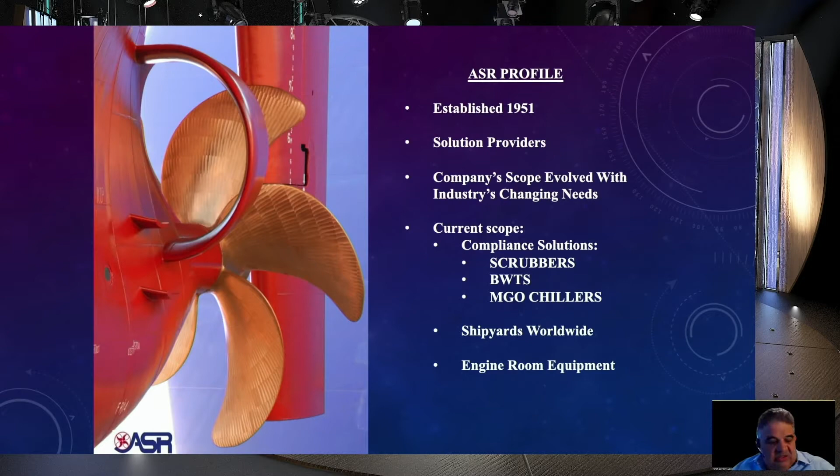Just a little bit of background on our company. We're established in 1951, a solution provider. We have evolved over the years based on the requirements of our customers and the market. Today, we're in the scrubber business, the ballast water treatment business, the MGO chiller business. We represent an international portfolio of shipyards, as well as an engine room equipment support business. Next slide, please.

Shipping, to borrow a phrase from one of my favorite movies, The Godfather, this is the business we've chosen. I'm sure many of you have been at cocktail parties where people say, oh, you're in shipping, what do you mean, like UPS? No, not like UPS, not like FedEx. This is a great business, an important business. We move 90% of everything, as the book says. The question these days is, can we do this work without harming the planet? And what regulations are there, and how do we comply with those regulations and do this important work that we do? Next slide, please.

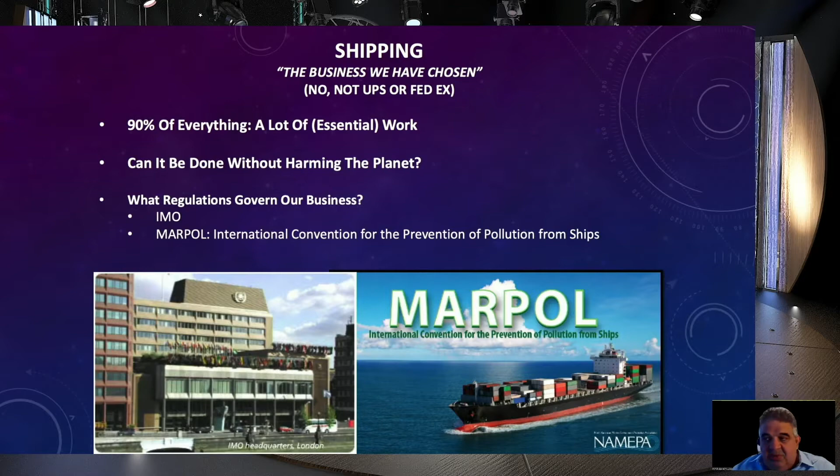Of course, we have the regulations of the IMO, and they are enforced, as everybody knows. We have the governing bodies that take from the IMO regulations and apply them to flag state. At the end of the day, your flag state says these are the regulations. If you don't comply, bottom line, we'll take your citizenship away, we'll take your flag away, you won't be able to trade. The enforcement part of it is at port state, which basically says, are you complying? If you're not complying, you can't leave our port, you can't trade. Here in the United States we have the U.S. Coast Guard, we have the Justice Department, which are not kidding in terms of enforcing these rules. If you don't comply, you can get not only your ship, but your company and even individuals in trouble, especially and recently with the Justice Department. Next slide, Joe, please.

So what are the regulations? I know I'm preaching to the choir here. MARPOL Regulation Annex 1, Annex 2, Annex 3. Next slide, please - I don't want to take too much time because we're going to cover this. Annex 4 for sewage, Annex 5 for garbage, Annex 6 for air pollution, all valiant efforts and all challenges, as this topic says. There are challenges and there are solutions. Next slide, please. So it's a lot, right?

Ballast water, invasive species - it's a serious business. It's not a joke, it's not a tree-hugging fantasy. It's an important business. If you look at these slides, the cartoon on the left, but on the right you see what one group of organisms did to a cooling system. This is important business, and it's something that's important and needs to be complied with.

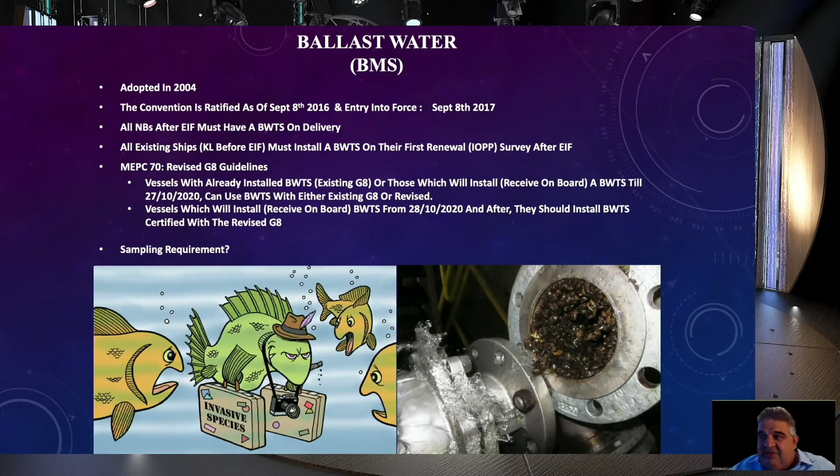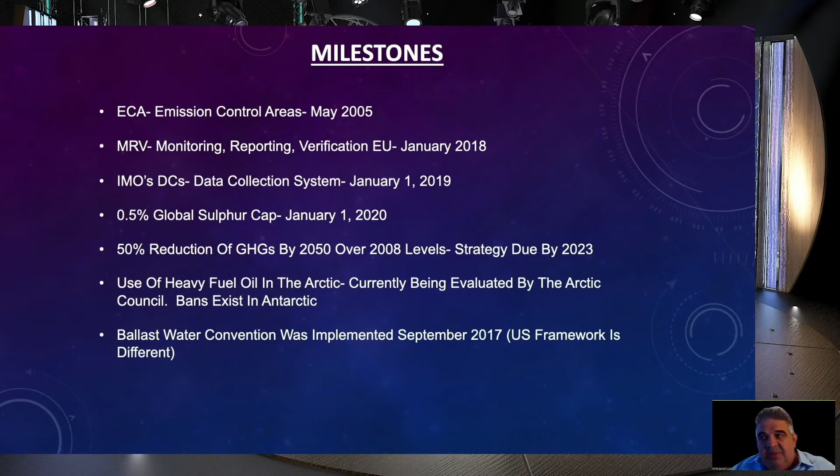Next slide, please. So what do we do? Well, let's first talk about the milestones. Of course we have the ECA regulation, MRV, the sulfur cap, the future planning for greenhouse gases and so forth, the Arctic preparation, prevention of further damage to the Arctic and the Antarctic, and the Ballast Water Convention, which is already in place, and measures have been taken in order to adhere and comply. So it's a lot. Next slide, please.

It can be daunting. So what do we do as an industry? What do we do as a populace? One, trust science. Two, listen to the experts. Full disclaimer, those two are not political statements these days. It just makes sense, right?

So today's expert speakers are going to show and discuss. I just tried to refresh on what the challenges are, but for the solutions, we have experts here who are going to show the science and the technology that is available to comply and meet these important regulations.

We have Dr. Effie Tsolaki from ERMA First, who's going to talk about ballast water compliance. We have Val Cannon from TMS Ocean Guardian, who's going to talk about the Ocean Guardian system, which helps navigate and organize and understand all these regulations based on where you are. Fantastic system. We have Nick Confuorto, also a friend, who's going to talk about Annex 6. Mr. Kyriazis from P-Ship Systems. And finally, Giles Candy from Scienco Fast, who's also going to talk about Ballast Water Technology. With that, I thank you, and I turn it over to the experts.

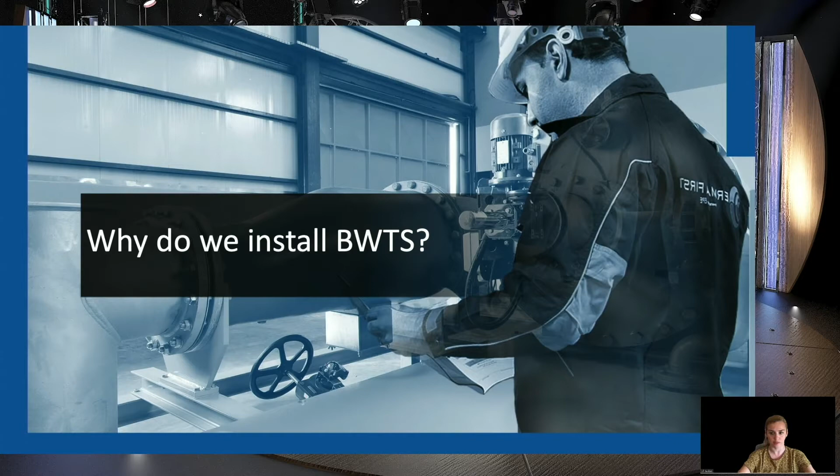So why do we install a ballast water treatment system? There are many reasons why a ballast water treatment system is necessary aboard a vessel. First of all, it is for environmental protection. Invasive aquatic species present a major threat to the marine ecosystem, and shipping has been identified as a major pathway for introducing species to new environments. So it is the obligation of the vessel to follow the rules.

The Ballast Water Management Convention came into force in September 2017, and this is the entry into force date. Since then, until 2024, all vessels of 400 gross tonnage and above should manage their ballast water and sediment to the D2 performance standard.

Other reasons, as Peter mentioned, are the ability of vessels to have the ticket to trade. After the entry into force of the convention, every vessel subject to it needs to have an International Ballast Water Management Certificate, which includes ballast water management via a ballast water treatment system. If such is not in place, then the vessel will not be able to trade.

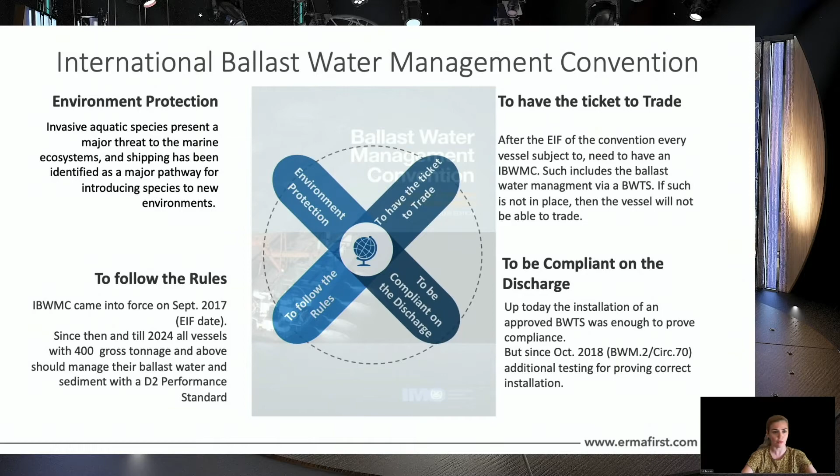The last reason is to be compliant on the discharge. Up to now, installation of an approved ballast water treatment system was enough to prove compliance. But since October 2018, additional testing for proving correct installation was introduced by the IMO with circular BWM.2 Circular 70. Next, please.

Let's continue with the ways to comply with the regulations. First of all, owners should select an efficient ballast water treatment system, not just a type-approved one. The administrations have already conducted several compliance tests on vessels, calling for reports. This is part of the IMO's experience building phase. As of today, almost 60% of those reports are failing on organisms more than 50 micron testing.

This is a problem, and what we need to do is understand the reason behind it—why we have these failures of more than 50 microns. The following failing reasons were identified.

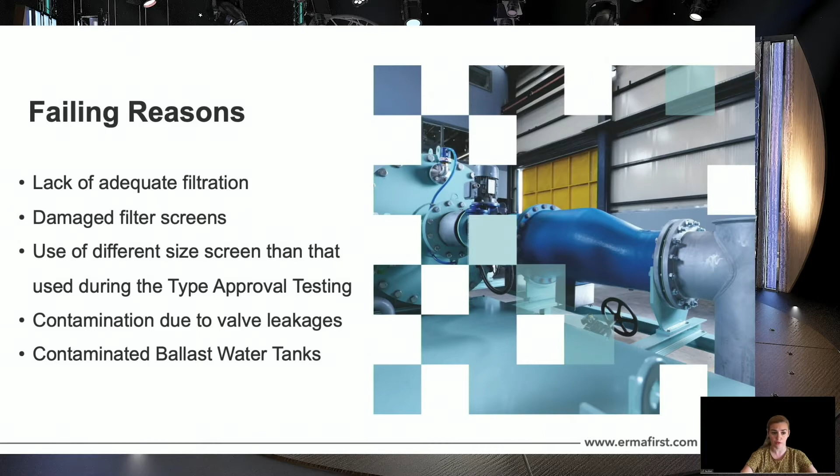We can have a lack of adequate filtration, damaged filter screens, the use of a different size screen than the one used during type approval testing, or contamination due to valve leakages or contamination of the ballast water tanks.

The second way to comply with the convention is proper use of the ballast water treatment system when it is installed. There are many cases where ship owners are not operating the system—they leave it idle. The system should be operable on every operation.

In order to use the ballast water treatment system, ship owners have to select a vendor that should provide full support to the operator and the crew. They must ensure critical spares are stored and available on board, and have a complete list of contingency measures in the ballast water management plan to avoid delays.

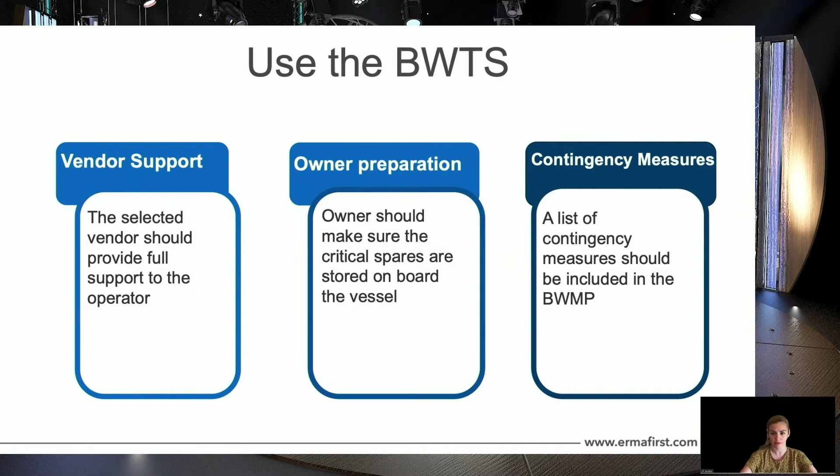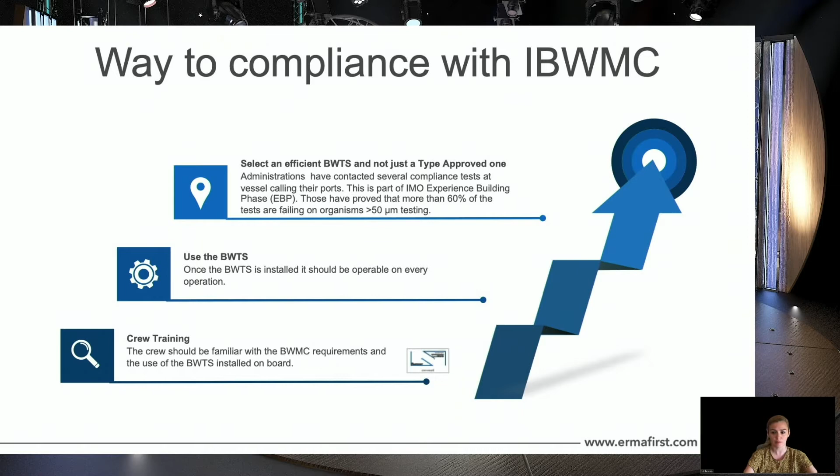Last, crew training is a very important aspect. The crew should be familiar with the convention requirements and the use of the ballast water treatment system installed on board.

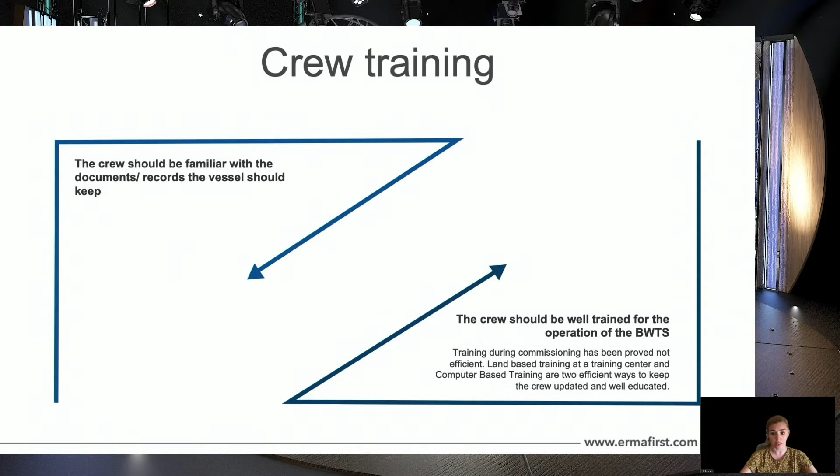The crew should be familiar with the documentation and records vessels must keep and report to every port and flag, and should be well trained on operating the ballast water treatment system. It was identified that training during commissioning has not been efficient. Land-based training at a training center and computer-based training are two efficient ways to keep the crew updated and well educated.

As we move forward in this technical workshop, the following section explains the way towards testing. We can start with what is the legislation trend that is around.

First, we have Circular 70, introduced back in 2018 by the IMO, which is the guidance for commissioning testing.

From summer 2019 onward, several countries have shared circulars or notice guidances for commissioning testing: Singapore, Panama, Australia, Cyprus, Greece, Bahamas, Croatia, and from classification societies, DNV GL.

The European Union has also announced the adoption of compliance testing and commissioning for all members from October 2021.

For the US flag, this is a different perspective entirely - protocols and sampling are different. We have two different bodies regulating this: the EPA VGP and what is mandated in the CFR rules.

Finally, in February 2020 during PPR 7, there was a draft amendment to Circular 70 sent for adoption to MEPC 75. This session was supposed to take place in spring 2020, but due to COVID-19 it was postponed to November 2020.

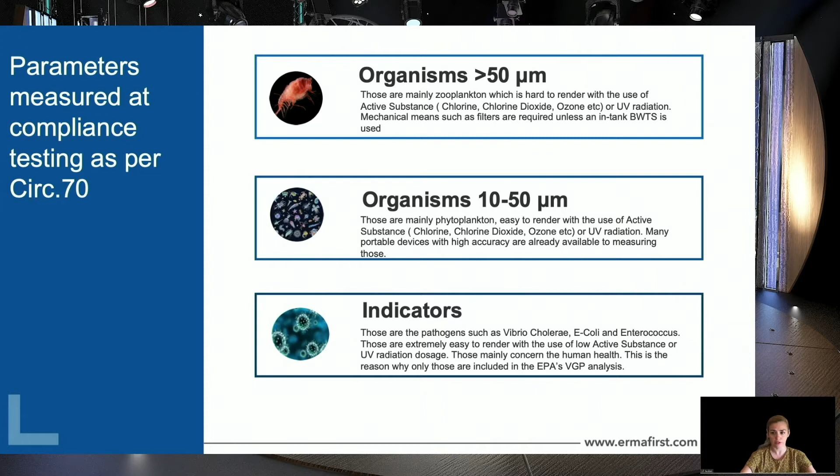I'd like to remind ourselves what is in Circular 70 and which parameters we measure for compliance. If we put them in three categories, we have organisms more than 50 microns, organisms 10 to 50 microns, and indicators. Those mainly concern human health, which is why only those are included in the EPA VGP analysis.

Apart from those, the EPA VGP requirements include sampling for residual biocides and ballast water treatment system record keeping and reporting.

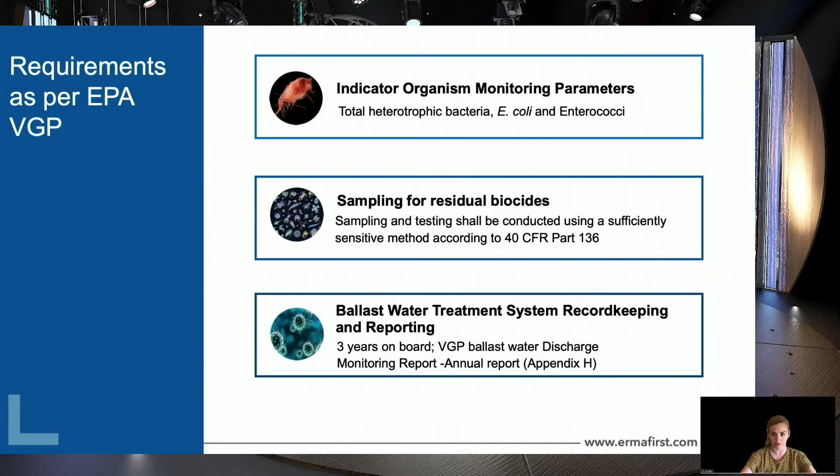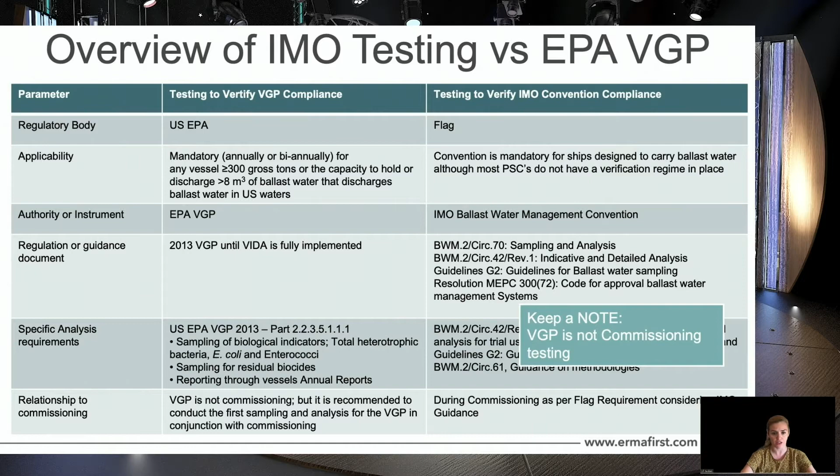So this is an overview of what is mandated for the IMO commissioning compliance testing versus the EPA VGP. What we want to keep from here is just a note that the VGP is not commissioning testing.

And for training, ship owners must ensure, in accordance with regulation B6 of the convention, that officers and crew are properly trained and competent to carry out their assigned ballast water management duties in all functions.

At last, we recommend asking for compliance testing to all ship owners. Compliance testing and commissioning will eventually become the industry's standard. So with these four pillars, we can follow a roadmap for successful implementation of the International Ballast Water Convention and an effective experience-building phase.

Thank you for your attention, and I look forward to your questions.

Very informative as usual. Yes, I believe she gave us a very clear pathway that a responsible ship owner can follow. Whether they select her equipment or not, they really need to follow all of those steps. Okay, so next we have Val, I believe.

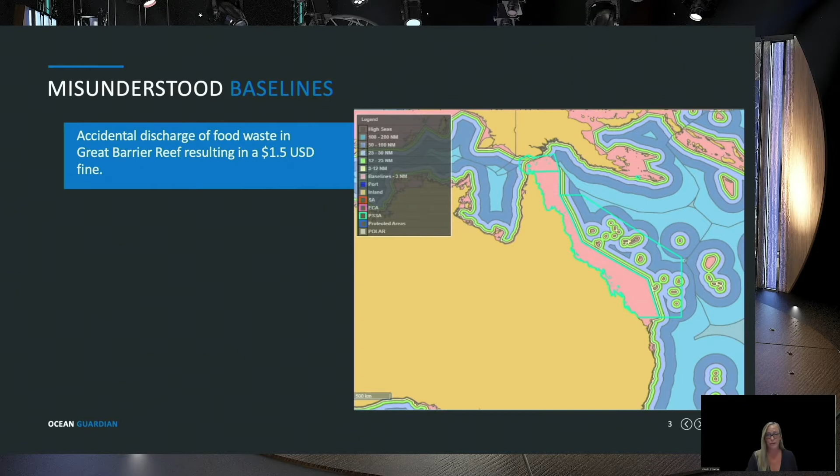The Bahamian archipelagic baselines can also be very challenging, and a number of vessels have been found to have accidentally discharged a variety of wastes inside these baselines, simply due to misinterpretation, but also resulting, unfortunately, in significant fines.

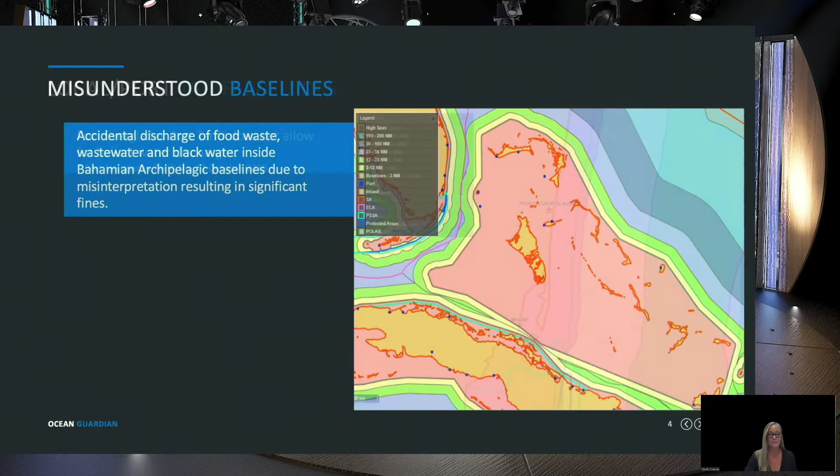Not being aware of the local port regulations can also result in these accidental non-compliant discharges. Agent information can be incorrect as they're also trying to stay on top of this regulatory load. And port tariffs and guides can change frequently and without notice. Port tariffs in the US generally are reviewed on an annual basis, but any changes may not be highlighted. Or if the language in that tariff doesn't change, as new issues and discharges like ballast water come into play, their inclusion in older language may not be fully understood. As an example, the Port Everglades port tariff does not allow for ballast water discharges due to the language that has been a part of that tariff for many, many years.

So owners and operators of US flag vessels may know and understand that states and local municipalities can impose stricter local regulations, but vessels coming from outside of the US may not. As an added note, just to highlight the complications even within the same region, regulations can be different. So while Port Everglades does not allow ballast water discharges, Miami, which is just down the road from us, does.

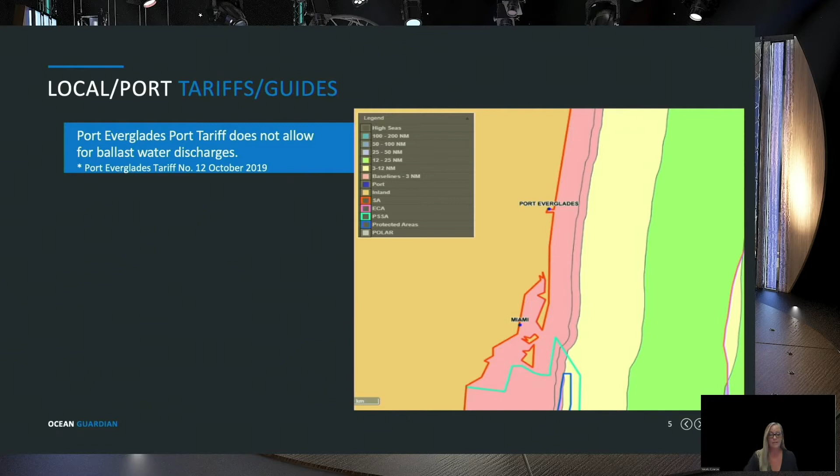Between 2012 and 2017, the US Coast Guard issued more than 700 vessel deficiencies for ballast-related incidents of noncompliance. In one instance, the company suffered both time and money lost when the vessel had to leave port to conduct the exchange outside of 200 nautical miles.

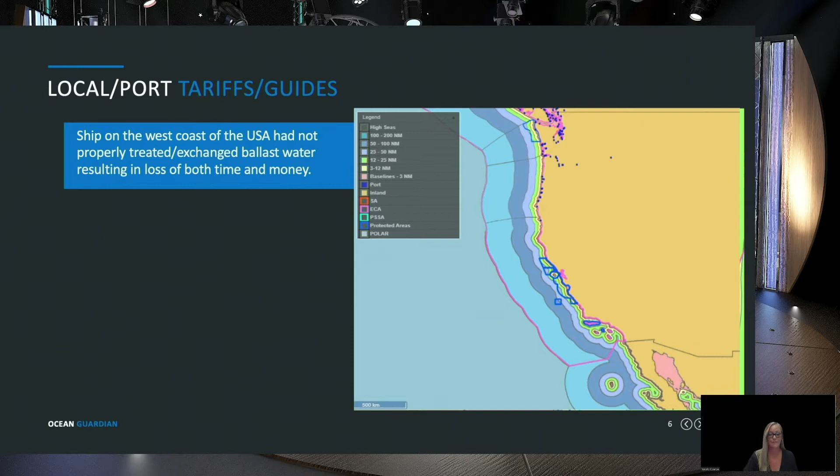Rapidly changing regulations present yet another obstacle. Discharging open loop EGCS wash water has been a particularly hot topic recently. It seems almost daily that more countries and ports are banning the use of open loop EGCS or the discharge of its wash water. The China ECA zones were put in place in a matter of months and do not allow the use of open loop EGCS.

Although a country may have stated they will not ban open loop wash water at the national level, the ports still might. The UK is an excellent example of this. My team continues to find UK ports that have put out recent guidance stating they're not allowing the open loop EGCS discharge. But decisions can also change rapidly in either direction, which affects ship operations. Argentina announced in early September that open loop EGCS wash water was not permitted to be discharged, but then this was quickly suspended in the course of a few days in late September.

Staying abreast of these changes is challenging to say the least. Email communications from agents are not always correct. Binders of guidance can very quickly be outdated, and spreadsheets cannot be secured against unauthorized changes. Digital solutions, system integrations, and collaboration are going to be essential in managing the vast number of environmental regulations.

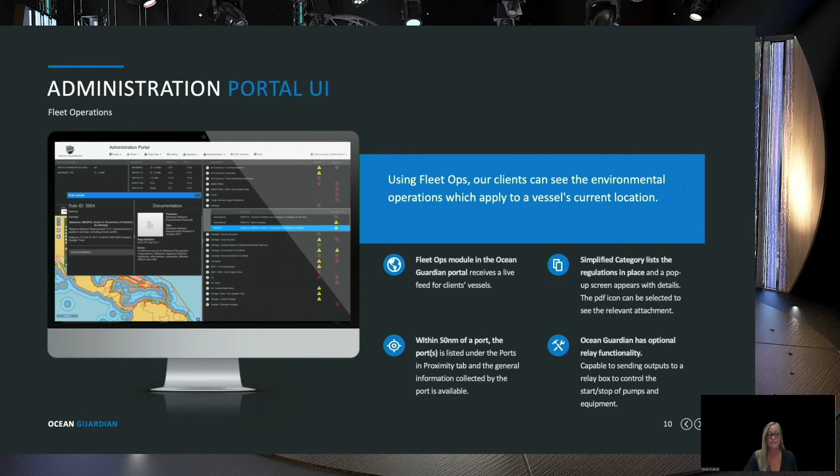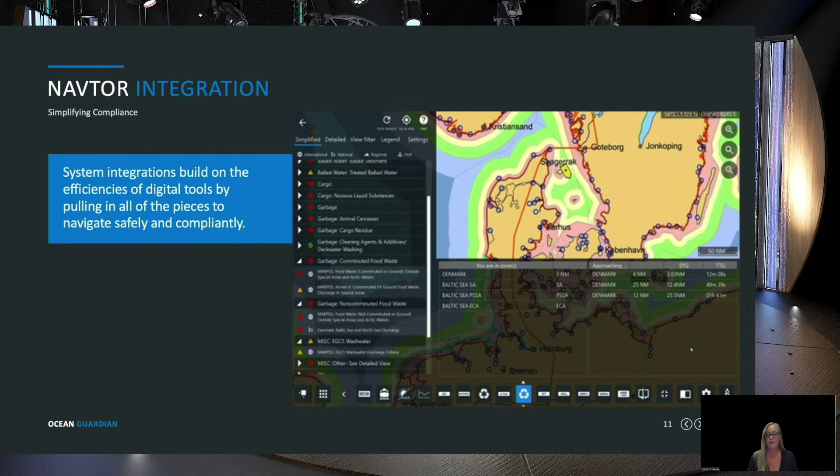Ocean Guardian has also been integrated into leading navigation software, such as that provided by Navtor, as an overlay to help streamline the planning process. This integration offers efficiencies of time and accuracy of planning. Simplifying compliance and solid decision support can help prevent accidental non-compliant discharges and benefit the bottom line.

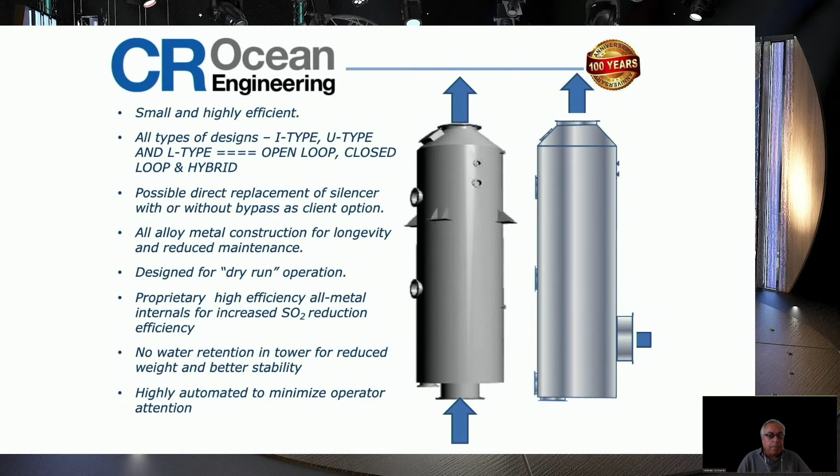Some of the benefits that people don't realize come from scrubbing systems, besides the sulfur emissions, which we can achieve well below even the MGO-used engines, we also reduce quite a lot of the particulates, even farther than the MGO itself. I'll show a slide that kind of shows that.

So for particulates reduction and SOx reduction, there is no comparison between what we can achieve and what MGO can do. The other thing most people do not know is that using heavy fuel with scrubbers, it's a lower CO2 footprint by about 10 to 14%. So it's quite a big plus if CO2 is a requirement for the ship owner.

And so the cost of operating HFO with scrubber is going to be quite lower than the operating on MGO or even the new low sulfur fuels.

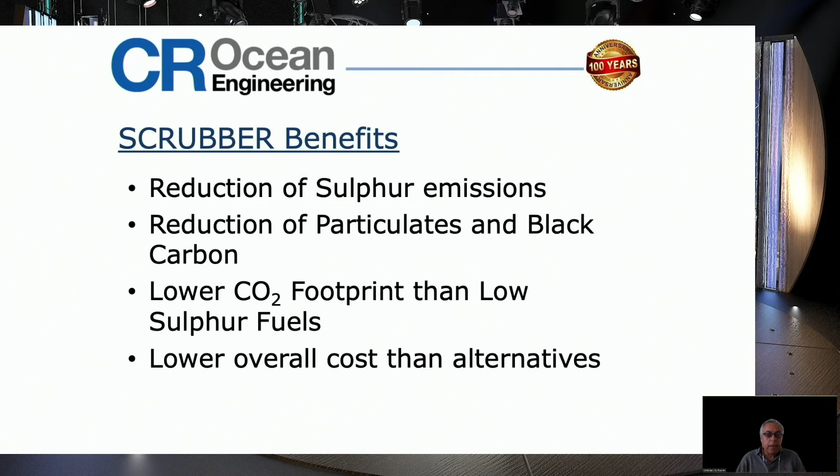The particles are larger, easier to be captured by the nose, and if you do breathe them in, it's easier to cough them out. But with the fine particles that MGO has, they go deep into the lungs and cause heart and lung disease much quicker and to a much higher extent.

So using MGO may sound great in some cases where they don't want to be bothered with scrubbers, but they are making things worse for the environment in terms of health effects. The idea of IMO issuing the regulation MARPOL Annex 6 was primarily to save people from heart and lung disease, but by switching to MGO, they actually made it worse.

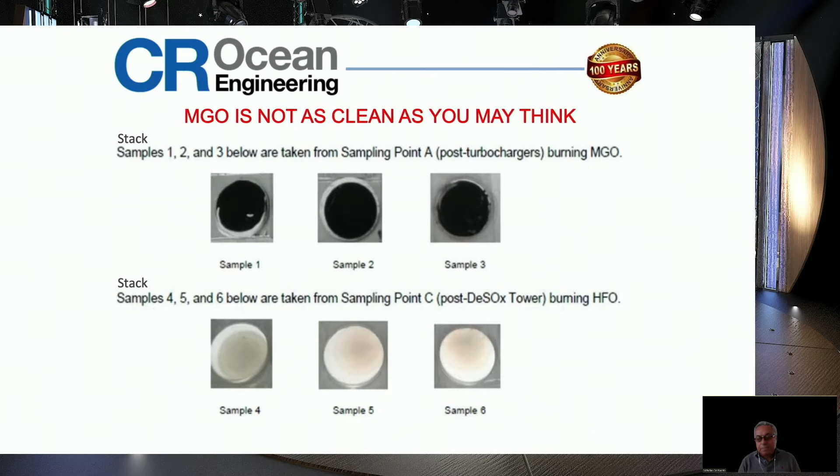Next slide. And the other issue that we see coming up in the next few years is this issue of open loop discharge and closed loop discharge.

In terms of open loop discharge, companies may at some point be forced into closed loop when they're in port. What we have done is we have prepared ourselves for that. So we now have three options that we offer our customers if they want to have water cleaning when they're in port.

Or if they buy a closed loop system completely, then they'll be using it all the time. But most customers are not going to buy closed loop. Most customers will buy hybrid systems, which give them the option to go open loop everywhere except when in port, where they can switch to closed loop only. Although we are working now on one that will be applied to open loop as well.

The difficulty with open loop is that the water is much cleaner. So when you look at water requirements, they're usually based on volume of water. And because there's such a large volume for open loop systems, when you look at what's actually found in a liter of water, for instance, it's very clean compared to closed loop.

Closed loop will be very dark because it's only a small amount of water and it's circulating, so it's concentrated with particulates and oils. But this system will clean that.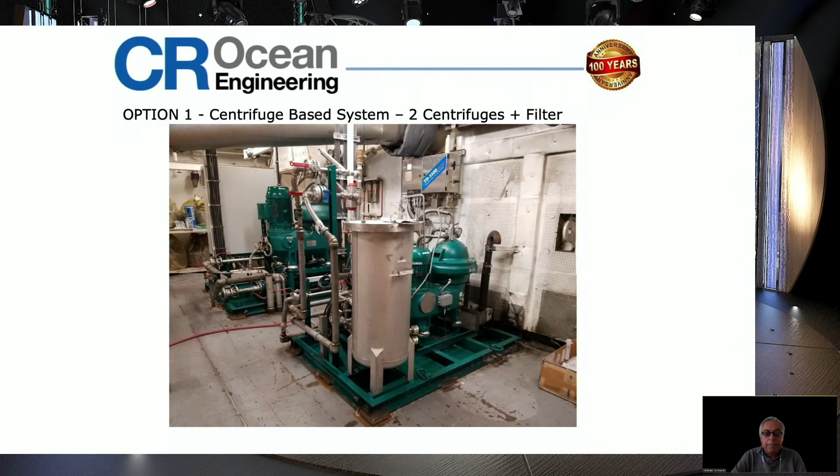Next slide. We also have a system that uses candle filters. This provides a sludge which is also pumpable, but it's less water, so it's a smaller amount of sludge.

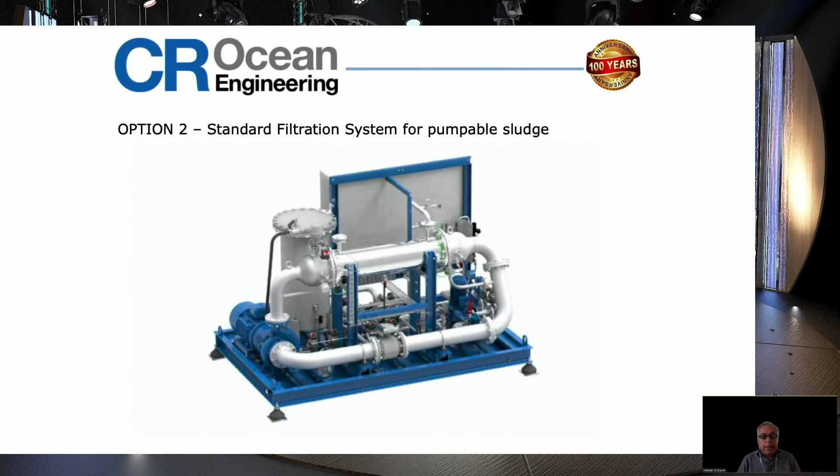Next slide. And also it comes in pre-built units so that they can just be brought on board and sit in a space.

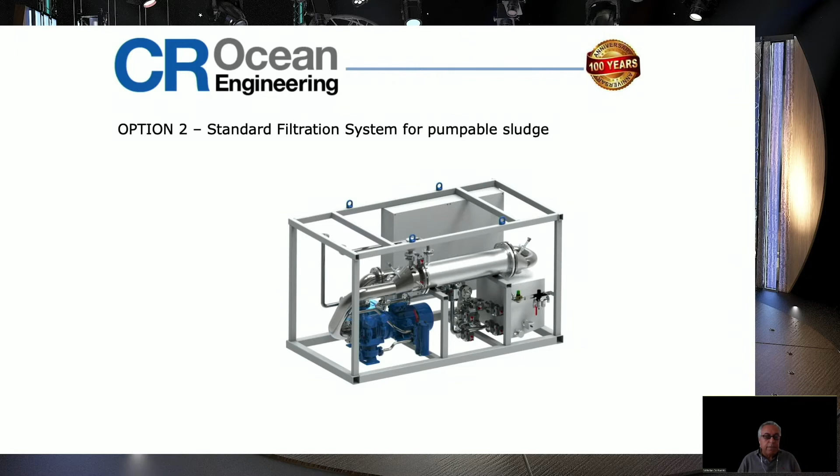And the final version of the water treatment that we are offering, next slide, is what we call Oberlin. This is a filtration system, a continuous filtration system. It uses some solids to agglomerate the oils. It actually encapsulates the particles and filters them out.

So that when you end up with a dry sludge, this is completely dry, it cannot be pumped. You will need to, as you see here on the left side in green, those are barrels. So the sludge comes into barrels and it's a dry sludge.

The positive thing about that is the volume is greatly reduced. So where you might have very large volumes of wet sludge, you will only have maybe one or two barrels of dry sludge. And since the disposal of the sludge is based on volume primarily, the savings are significant in the disposal costs.

So most customers that have gone for this are looking at using it to save money on disposal costs, and therefore the savings will pay for the initial cost of the equipment. And after that, we'll also be able to operate the system at a great saving. Next slide.

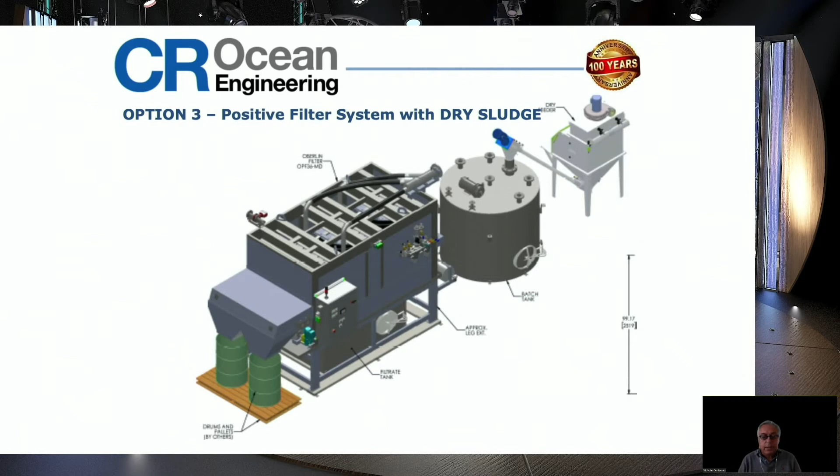After the clean, it is fairly clean. This is the most efficient clean system for water discharge. Luckily, it does not cost any more than the others, but it's a preference of dry versus wet.

Next slide, if any. And that was the prepared portion to meet my 7-minute requirement. Thank you very much.

Can you please move on to the next slide, please? Okay, so as we all know, the revised MARPOL Annex 5 prohibits the discharge of all types of garbage and trash plastic into the sea, including garbage management, port reception facilities, and of course the enhancement of compliance with MARPOL Annex 5. Next slide, please.

As we all know, there are a lot of challenges with potable water on board. There's plenty of water generation on ships. Then we have the embedded water storage tanks with maintenance, still water, stirring from vessel movements. Then we have different types of water pipes on board with water flowing through, yellowish tap water, as we've seen with quite a few clients, even on new build vessels.

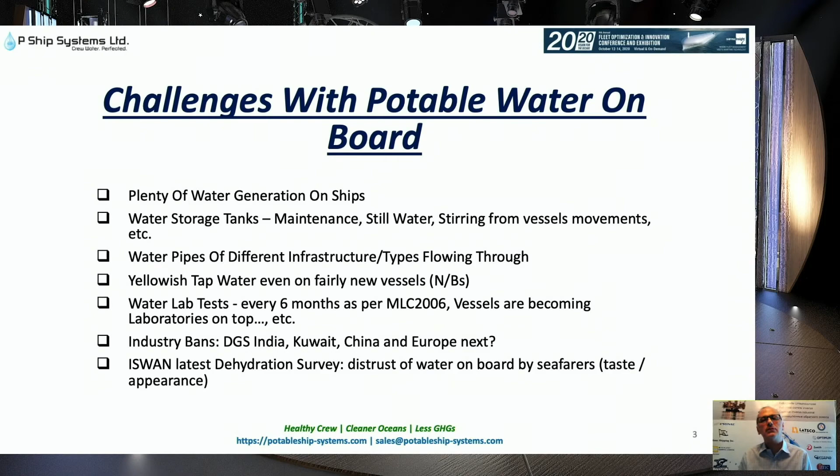Of course, we have the MLC 2006 requirement for every 6 months to have water laboratory results, plus the industry bans from DGS India and Kuwait regarding plastic bottles, plus the ISWAN's latest dehydration survey. We've seen where crew has some kind of distrust of onboard water due to taste and appearance. Next slide, please. Great, thank you.

And then, as we've all seen in the news, there are various incidents and reports on plastic bottled water, with World Health Organization's health review following Fredonia's New York State University research, Nestlé's lawsuit on tampering, the Poland Spring water being ordinary groundwater, and various other studies which are all the time getting online, with plastic bottles really affecting everybody who is breathing globally.

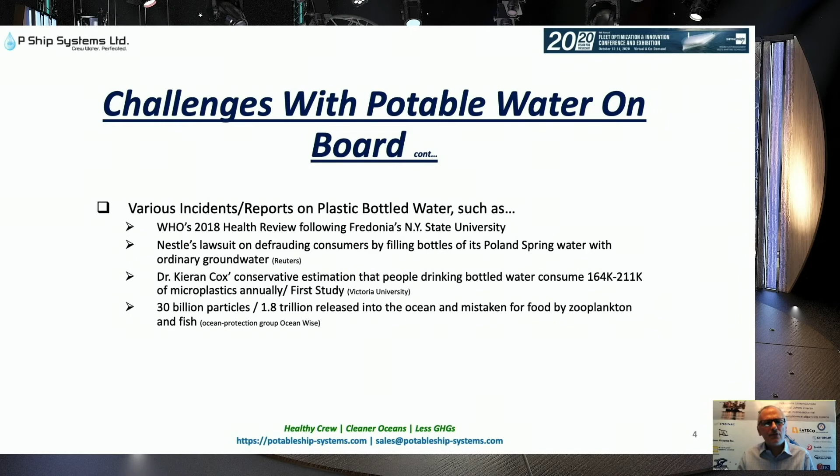We'll see a short video. Can we go to the next slide, please?

Okay, so very quickly, we have a long background in the commercial shipping industry and technical expertise. We're focusing exclusively on solutions and systems dedicated to the shipping industry. We're working very closely with Puricom, the oldest water treatment manufacturer, and as P Ship Systems we design, develop, distribute, update, and fully support branded drinking water vessel systems, and we of course follow all standards and regulations on all aspects. Our solutions actually exceed the drinking water regulations in the industry.

And we have distribution centers in Rotterdam, Athens, and Barcelona, and we recently added new warehouses in Houston, UAE, Singapore, and Hong Kong, so that clients can have quick, fast, and cost-effective access to our systems and consumables around. We are Puricom and Kinetico USA's official partner and global distributor for the global shipping industry. And we have behind us engineers, chemists, test laboratories, and everything else needed in order to help shipping companies solve the main issue with plastic bottled water on board, and also protect their crew. Next slide, please.

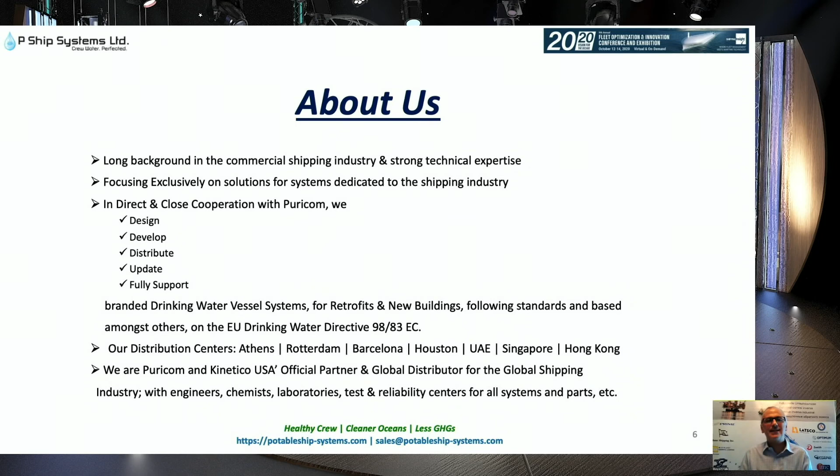As a conclusion, we're having many systems in place. We've not seen a video, unfortunately, on board vessels sailing globally. We're helping shipping companies easily, quickly, fast, securely, and cost-effectively get rid of plastic bottled water on board their vessels, and have a great, constantly freshly produced drinking water system on board by combining vessel-produced water with our autonomous and compact drinking water vessel system.

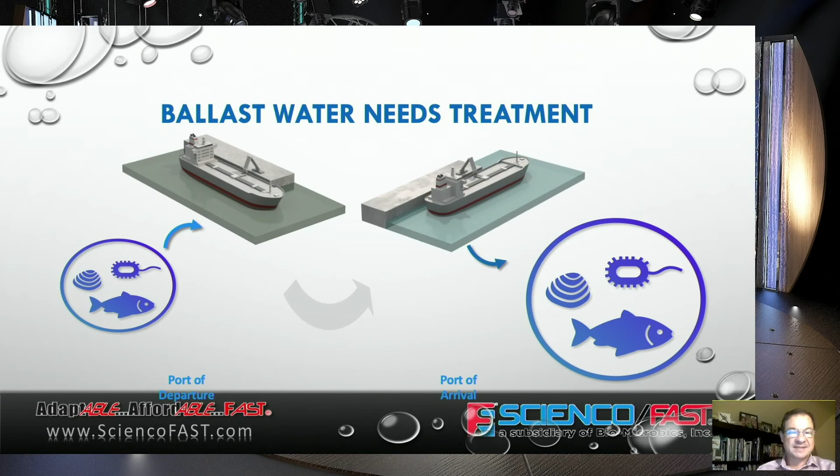Regulation, as Effie said, has been coming and promulgated for a long time. In the United States, there are the federal laws governed by and enforced by the Coast Guard, and there are the vessel general permit laws governed by the EPA. Hopefully these two will come together and be harmonized in the Vessel Incidental Discharge Act, the first version of which was pre-published this week by the EPA. Next slide, please.

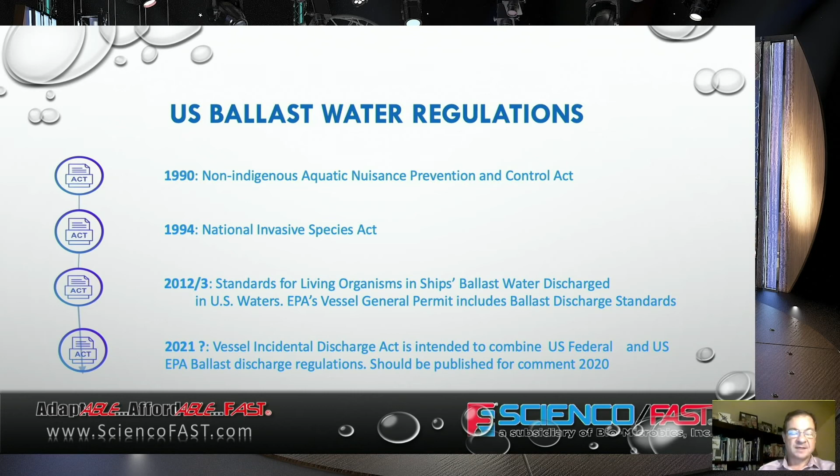The IMO is governing ballast water discharges worldwide with a convention finalized in 2004. The compliance schedule didn't really start until 2019, 15 years later. It's been condensed into 5 years, finishing for retrofits in 2024. The laws are applicable to new vessels today. There's one small wrinkle: later this month, the IMO will require that all systems being fit to install on vessels be tested and certified to the revised G8 guidelines from 2016 instead of the original ones from 2004. Next slide, please.

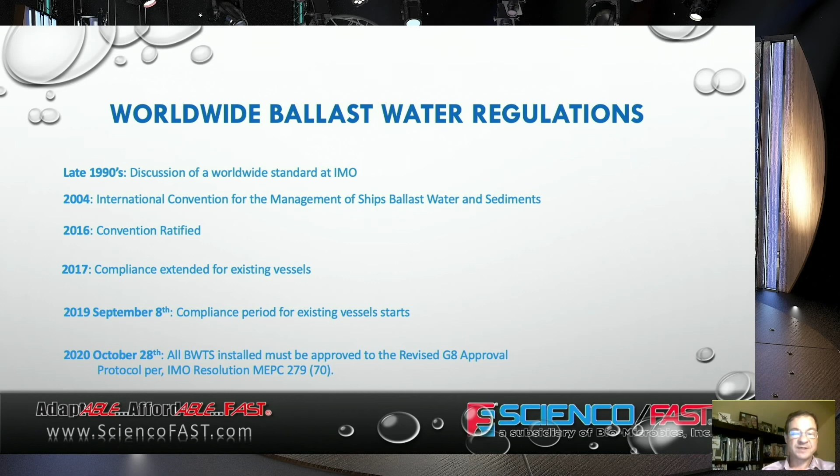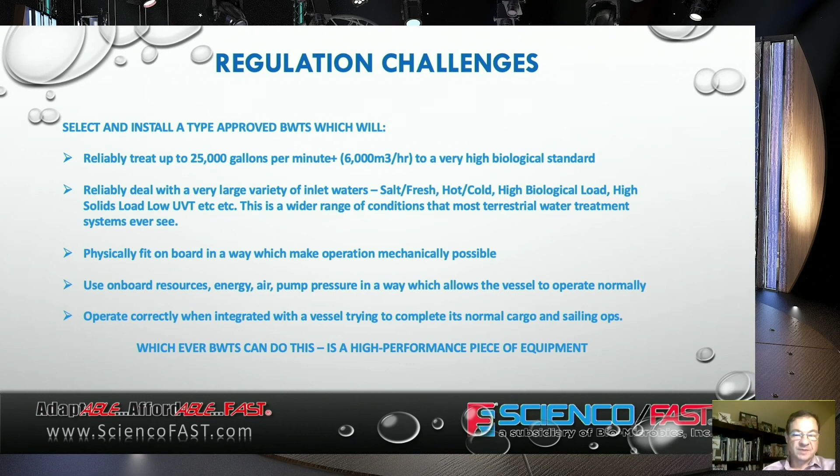So what are the challenges? An owner or manager has to select a system, and it's a challenging water treatment exercise. My background is water treatment. I'm trying to treat very large flows of water, up to 25,000 gallons a minute for a VLCC, with a very large range of water quality. You could be looking at salt, fresh, hot, cold, very high UVT, low UVT, high loads of sediments or other materials, DOC. This puts quite a stress on the treatment system, which actually has to physically fit on board a ship, unlike a terrestrial system, and be able to use the ship's resources—energy, air, pumps, etc.—and operate correctly with the ship's normal operating regime. This is tough, so any treatment system achieving these standards is a high performance piece of equipment, and it should be treated as such. Next slide, please.

So once you've looked at treatment systems, what are the compliance challenges? An owner will be looked at to provide technical compliance and biological compliance. Technical compliance is mostly paperwork: a ballast water management plan, reporting forms, documentation of training, responsibility for the crews to understand the regulations. The treatment system must demonstrate it was operating in compliance with its type approval certificate. Where it is not, the crew and the system must show that an accepted contingency, as outlined in the vessel's ballast water management plan, was followed where the treatment system could not work correctly. An accepted contingency must be followed.

Biological compliance—the vessel is responsible to be in biological compliance, but it's not actually responsible to prove it, VGP aside. Biological compliance must be proved or disproved by port state enforcement. The mechanics of enforcement and compliance are not really nailed down, as Effie mentioned earlier. It's a little bit odd that we had a convention finalized in 2004, and today we're in an experience-building phase to establish how compliance will be enforced. Next slide, please.

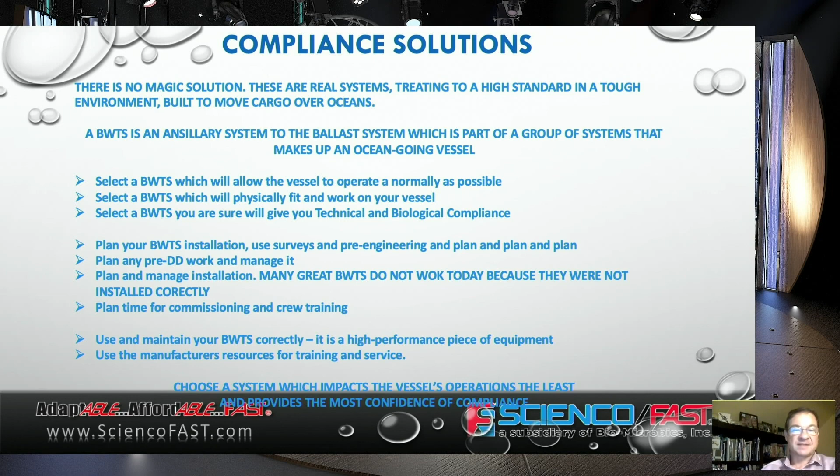So is there any innovation or a more elegant second generation solution around? Well, water treatment has been done for a long time. It is unlikely that there will be a fundamentally different way to treat water available. But there are different ways to use ballast water treatment systems.

I'm associated with the in-tank system, which is treating in the tank during the voyage. This allows a vessel to complete ballasting as normal without filters. As Effie pointed out earlier, filters can fail and produce problems. The in-tank system is designed and tested to treat without filter. We essentially swap time of exposure for a filter, which allows the larger organisms to be treated.

Treating in-tank during the voyage allows any issues with the system to be solved during the voyage. And it also allows treatment and neutralization to be recorded during the voyage. So technical compliance is assured and reported or recorded before discharge in port. Discharge as normal, without filtration, without treatment, and discharge from gravity tanks is fine.

This allows in-place ballasting and deballasting for a semi-submersible, for example. So I think this is a more elegant solution for many ships, not all ships, but for many ships this will provide a more elegant solution and some potential for optimizing compliance with ballast water regulations.